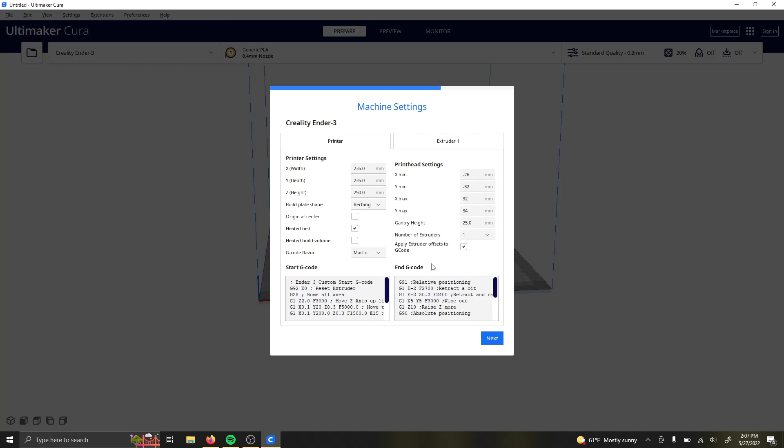There shouldn't be any reason to change this. This is saying the dimension of the print bed, if we have a heated bed, and kind of what happens when this thing starts up. I'm just going to keep it at the default. This is just letting us know there's some new stuff here. Great, I'm just going to skip it, finish that, and we should be ready to rock and roll about right now.

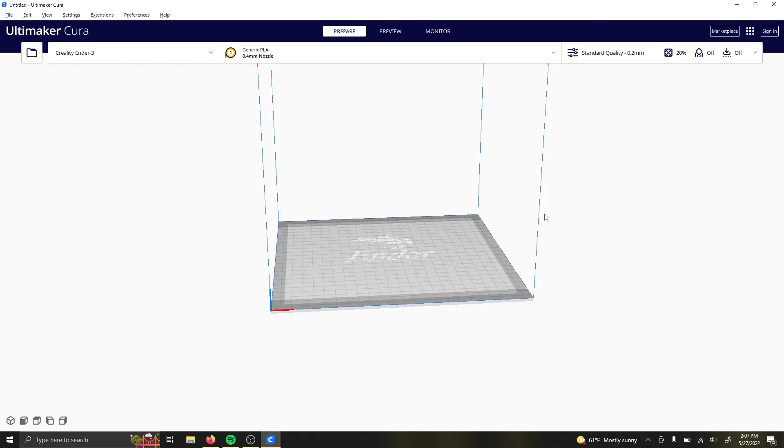Here's what I'm going to do. We'll probably take a deeper look at what some of these settings mean, but right now at this point we just want to get our basic print.

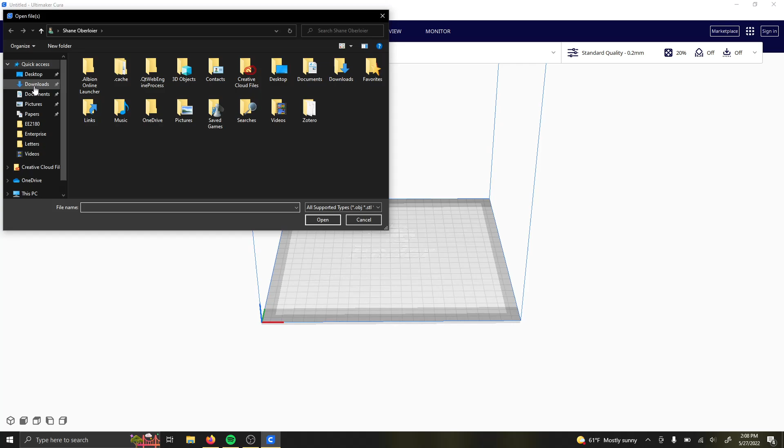I'm going to click on this Benchy here, and Thingiverse, this is 3dbenchy.stl. I'm actually a little surprised it's 10 megabytes, but whatever. I'm going to load it in, so I'll go to my downloads, and there's Benchy right there. So I pulled in Benchy, and boop, there it is, ready to rock and roll.

Now we can slice it, and what this is doing is figuring out how the 3D printer can move and extrude to produce this. It says it's going to take 1 hour and 47 minutes, 11 grams of filament, or 3.72 meters worth of filament.

You can see by default it's going to be printing with PLA with our 0.4 millimeter nozzle, which is the default. We'll get into these settings later. There's different profiles for how thickly we extrude, so this is 0.2 millimeter layer height. We could bring this up to like 0.28, in which case it should print quicker, but it will be kind of a little bit more blocky.

And this infill is how dense the interior space is.

If you've never watched something 3D print, I highly encourage watching this. In fact, it will probably be hard for you to not watch it print from start to end, just because if you're in any way like me, your first 3D print is a special moment, and you will probably watch the first several.

That said, we can keep this at the default, and I have save to disk here. So I could just save this G-code file, but actually what we need to do is use the flash drive with the SD card, the micro SD card that came with your printer.

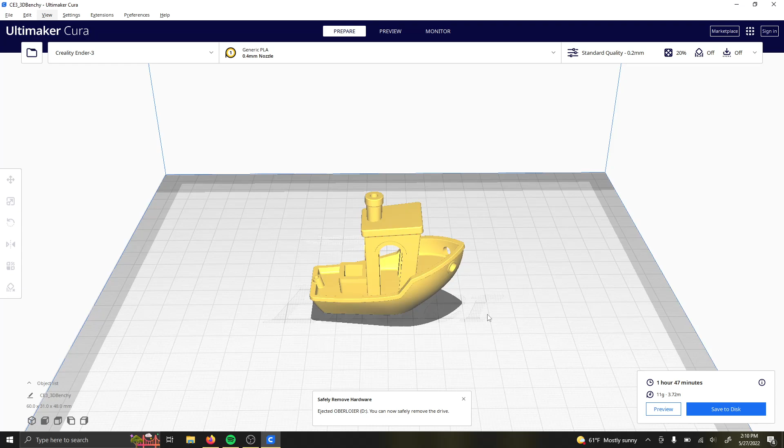And now you're about ready to rock and roll. Just one quick little bonus thing, if you've stuck with me this long, a cool thing that I always like to look at is this preview.

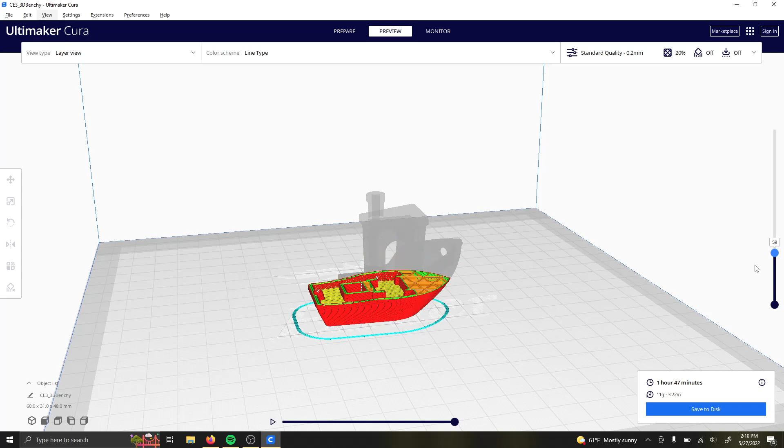If you go to preview, what this will do is show us what the slicer came up with, right? So this is actually showing kind of what the 3D printer is going to do and how it's going to go about constructing this. This is a neat feature. I've always kind of liked to see the logic that the slicing algorithms use.

But anyway, yeah, so now all that's left is to put the SD card in your printer and get it to start printing.